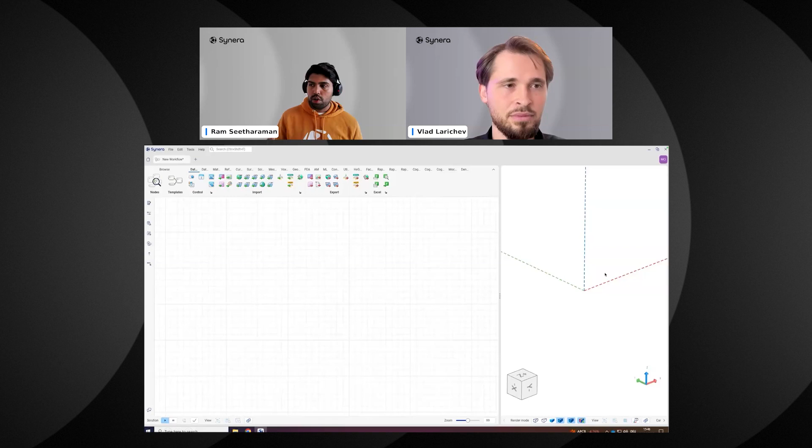So a short demo of how Synera looks and works. This is Synera. On the left is a canvas, and on the right is a 3D viewer. What we can do on the left is put our processes and digitalize them. For now, let's build a simple multiplication process. So it looks like this. On the left there are inputs, and on the right we get the output of this process.

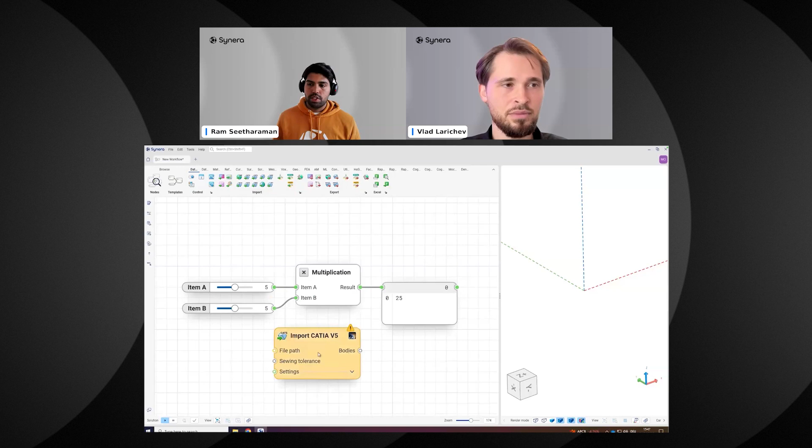Now we also have a lot of engineering data capabilities where we can import them, for example to connect Excel or CAD. We can also build all the engineering formulae and other engineering tools. For example, let's take a sphere. Let's say we want to build a sphere with a certain radius, and we could already connect it. Now we see the sphere is a process.

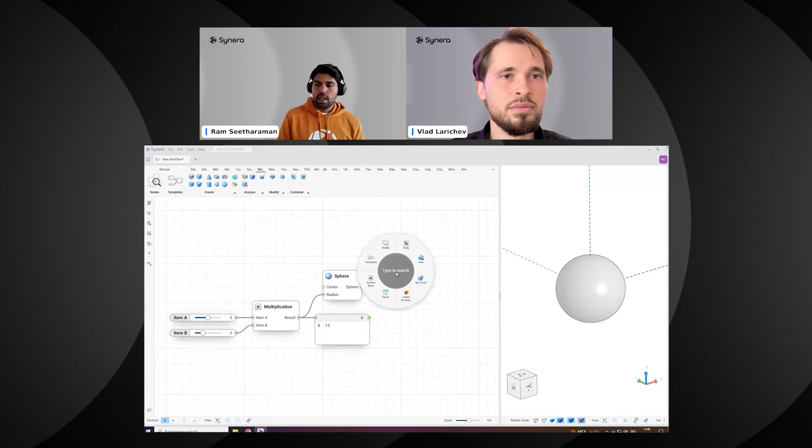If we keep continuing this the same way Vlad explained his digital reasoning thread, we have a digital tool thread, and we see the mesh connecting into the same process, so the data keeps flowing. Now we can connect more and more tools, and at the end what we have is a nice way to encapsulate a lot of these. It could connect to the Altair system, or a bunch of different ecosystems, and we see how these could all work together.

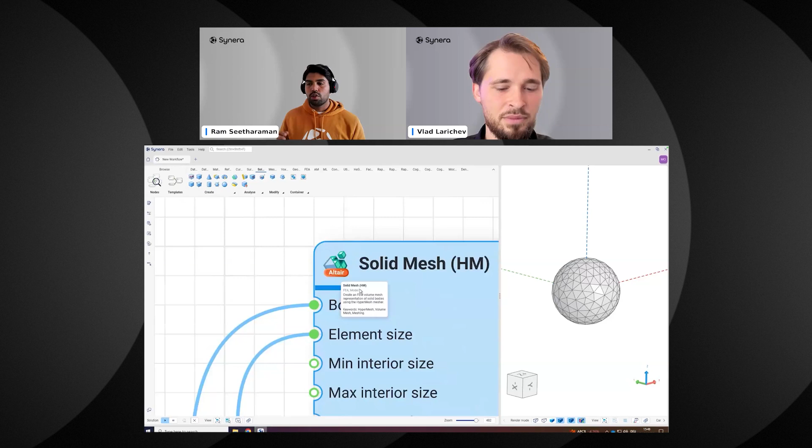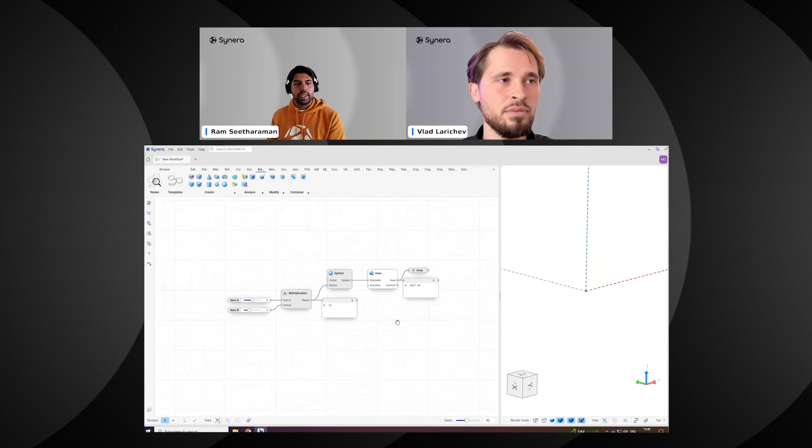Now a key point in these kinds of automations is how do we now expose them? We need to make sure these automations aren't just lying on the platform, but are actually used. So Vlad mentioned having these hooks where we can call this automation so we can reuse it. Now what we will do is convert this automation into something that can be called, making these as inputs for this automation and then exposing an output.

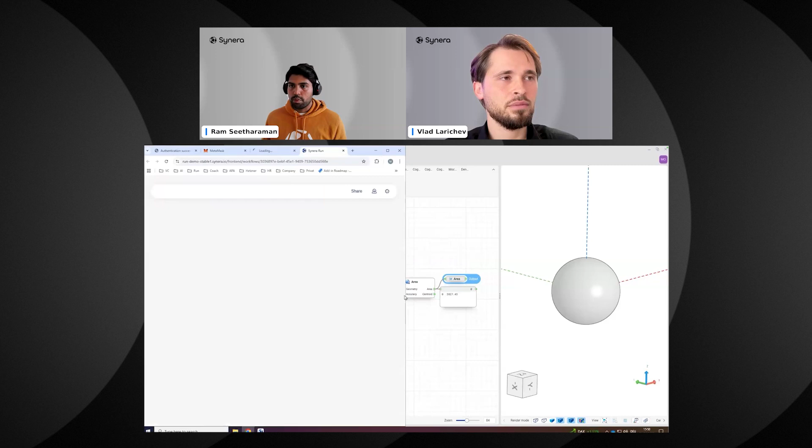I could also just make sure this is visible in my automation. Then I could say how I want to connect all of these things, basically save it, and then publish it. When I publish it, what we get here is an automation. Now we see it's not the same interface anymore, but we could run our processes here much more elegantly. So this is how we could scale automations.

Now, the reason the scalability aspect is so important is, like Vlad also pointed out his challenges, what he saw, or what we see. First, we need to standardize a lot of processes. So we need to make sure everything is stable, things are getting unified, and this is the foundation for agents to use. We also need this data flow and need to connect automations that are lying in different domains, not just engineering, but also business systems. So this is always a process that needs to be connected.

And the last critical piece is the human-in-loop confidence. So we always need some kind of governance systems by which we can know, okay, what agent is doing what, automation is at what state, what are the rights that everybody has. And this is basically what we call Synera run before we go to agents.

And to show how some of these look, what we have in Synera is two kinds of personas, where consumer is the people who consume automation, creators are the people who create these automations. So as a creator, we get a lot of control over who is having my session, when was it started, how long is it running, and we also have complete control over this automation. And then I, as a consumer, as a human who wants to use this, I can just go into them, interact with these systems, and make sure I have an automation as a mechanism to monitor these things.

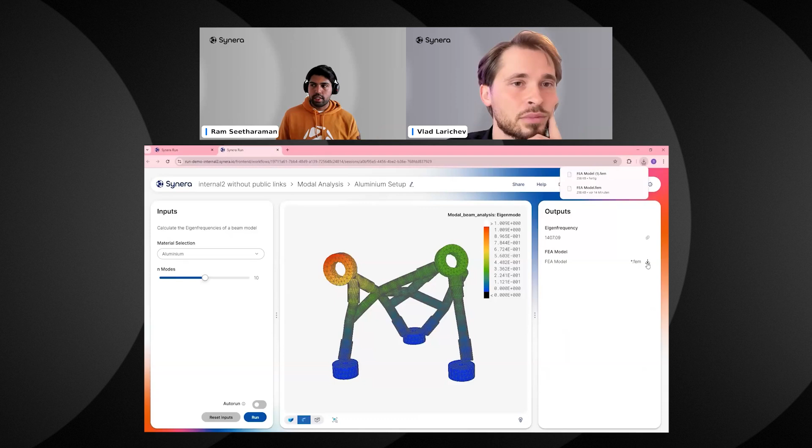Now, we saw how we could scale automation, but one thing that we also learned at Synera was that we need to determine what kind of automation or AI is suitable for which task. So we classify it on two axes: one is the autonomy, and then the human-like or task fuzziness.

So when we have a process that's highly rule-based, that it always follows the same pattern and doesn't need any challenges, we could always go to a rule-based workflow. So we actually don't need agents. When we need agents is when we want more human-like reasoning, and also let that agent decide, should I use tool A or should I use tool B?

And like we saw, there is this context degradation problem when we try to connect a lot of domains together, a lot of tools together, the data loss is very evident. And that's why we go for multi-agent systems. These multi-agent systems are really useful when we are trying to connect not just one domain, but a wide range of domains and at high frequency. And this is where multi-agents can really excel.

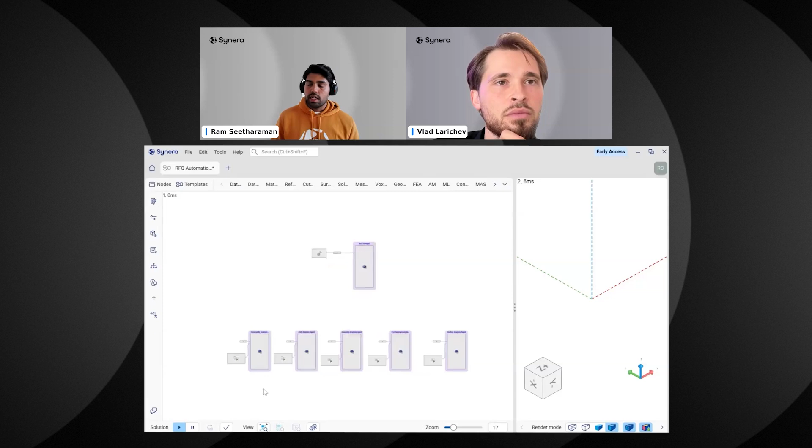And now when we put all these pieces together, we see how this orchestration that Vlad mentioned could be possible. So here we see a multi-agent setup almost ready. So I have this commodity agent, the CAD agent, the assembly agent here, and also a purchasing agent, and then finally a costing agent. And at the top of this sits a supervisor, which is the management that we talked about, who coordinates and routes all the different things. And now we can simply connect these agents.

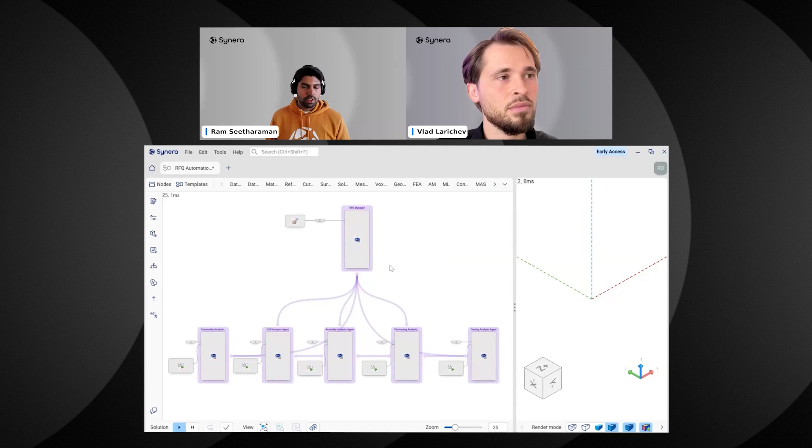We can also determine who talks to who. So the commodity agent can talk to CAD, can talk to assembly agent, can talk to purchasing agent, and finally they all can talk to each other. So this real orchestration becomes possible, and with a low-code platform with drag and drop agents, we can already build this.

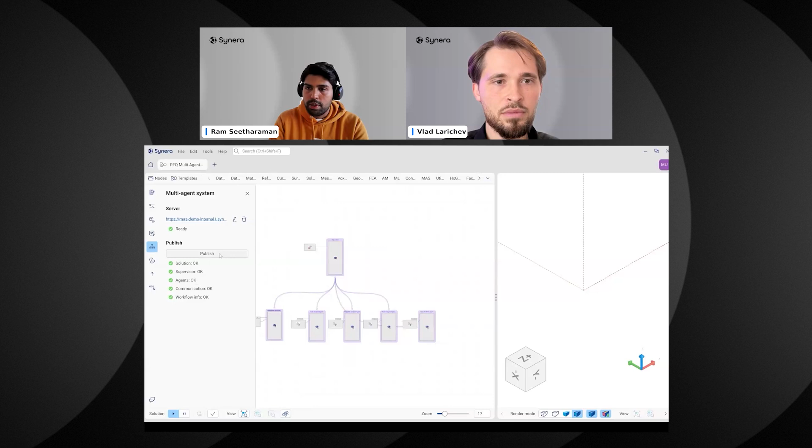Now let's publish it as an agent system and see how we can start using them. So again, I will save my workflow now as a multi-agent system, put in a description, and I could already publish them. As soon as I publish, we now also get a more chat interface. So let me start a new session now. We see that the agentic system now already comes with an introduction.

So what can it do actually? Now I can put in an engineering requirement, and it is not going to reply me in text now, but it will take these requirements and actually operate engineering tools. So I just put in a request for a part that we built, and now we see the supervisor is starting to think, it's starting to work, and it says, okay, I understand what you have done. I need these requirements, so I will coordinate with other agents. And now we see the commodity analysis agent is using an engineering tool to get the answer without having to generate just text.

So it got all the needed dimensions, what kind of parts. Did it also find it in the database? And once this has been found, then the commodity analysis agent reasons itself to see, did I achieve my goal? What did I achieve? What do I still need? And then this information is passed next to the CAD agent. The CAD agent's focus is only on making sure CAD is needed. And again, in the same way, every agent owns its domain and all the tools are connected. So we see also the CAD agent's output now.

And then in a similar way, if we keep going, all agents would do their reasoning analysis. And finally, we come with this conclusion. And now we can keep challenging the system and keep exploring ideas.

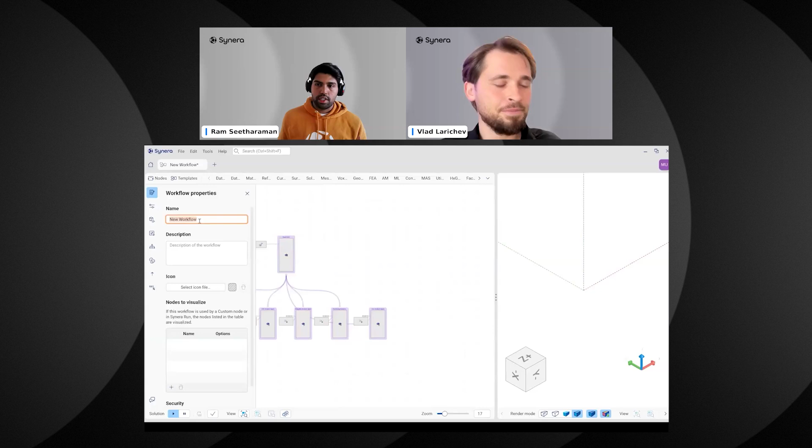To summarize what we saw today, we know that for agents to work, we need a lot of different mechanisms or steps. And the ultimate goal that we want to achieve is definitely efficiency, collaboration, and of course, more creativity. But to go there, what we need is a more bottom-up approach where we first need to go to our data, our sources of data, and we need to see what are the different tools that we use in engineering. And then we need a mechanism to combine them.

And there we see a platform like Synera with its low-code foundation would help in this connectivity layer. And of course, in Synera, you can build agents, but only after these kinds of scalable automations are available can agents really use them. And then we realize the benefits of how we could make sure that agents in engineering are not just hype, but actually could be applied into our different organizations.

So that is how we saw some of the problems that the fabulous team at Accenture is working on, and how our solutions could fit in.